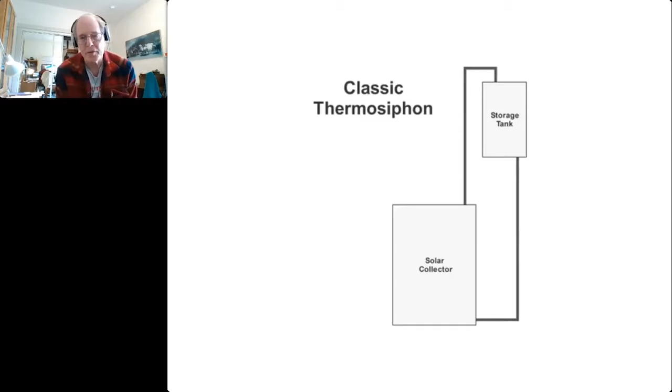Thermosyphon systems are remarkably simple. If you look at the diagram here, you can see it's just a basic loop with a solar collector and a storage tank. The basic design principle is you mount a tank above a flat plate solar collector. You plumb the top of the collector to the top of the tank, and the bottom of the collector to the bottom of the tank. It's simplicity itself.

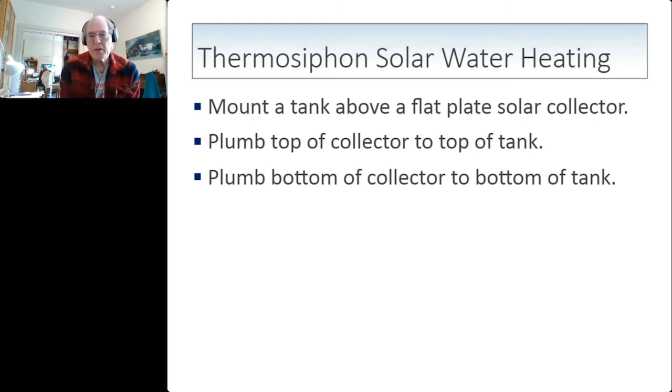Thermosyphon systems operate when the sun shines on the collector and warms it up, and the warm water rises into the elevated tank, while the coldest water at the bottom of the tank sinks down into the bottom of the collector, creating a circulation loop.

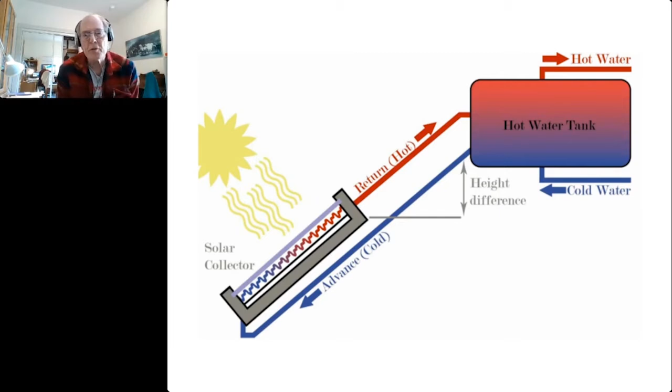The advantages of thermosyphon are many. They are completely automatic — they flow when the collector is warmer than the tank, and stop when it's not. There are no complicated parts to fail. There's no heat exchanger or toxic fluids. No electricity is required. It's inexpensive, and it's simple enough to do yourself.

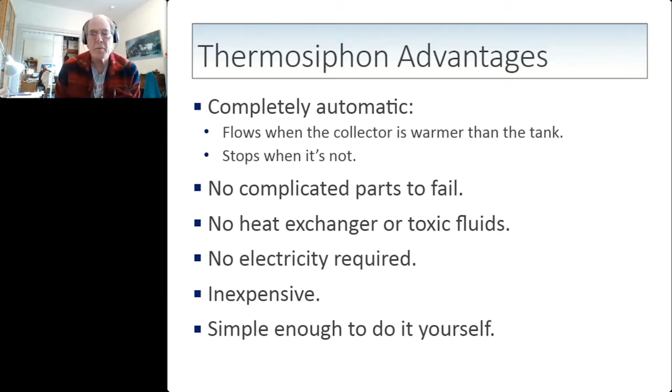Thermosyphon has a couple of disadvantages. One is that the tank must be above the collector in order for the warm water to rise into it. If you have a source of water in an open system — operating at house pressure as part of the pressurized system — you could have a problem with hard water creating scale inside the collector, since you're circulating ordinary water through it. And because it's a thermosyphon system, it has relatively slow circulation compared to a pump system, so there's more heat loss, making it a little less efficient.

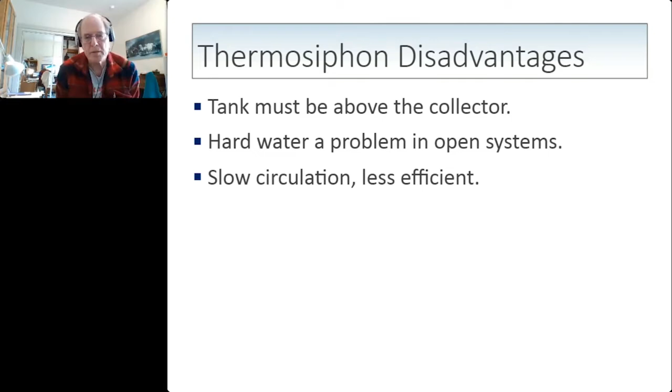But of course, the big disadvantage with the thermosyphon system is its Achilles heel, which is freezing. It's an unfortunate property of water that it expands when it freezes, and the pressure can burst the pipes in the solar water heating collector. A single cold night is enough to ruin your collector.

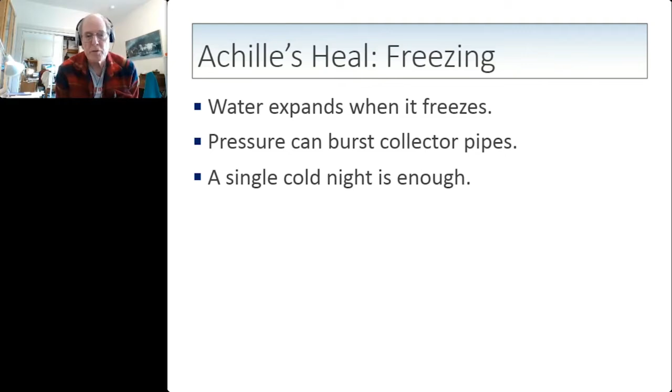So people have put in place various freeze protection solutions to prevent solar water heating systems from experiencing those broken pipes: a drain-down system, a drain-back system, antifreeze with a heat exchanger. But any of these create complications, so it's no longer simple and no longer cheap.

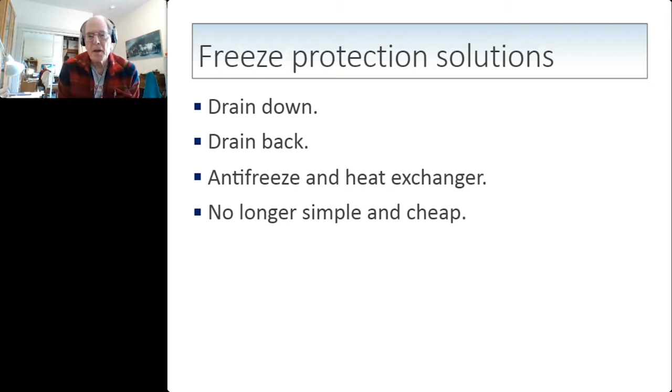So I went back to basics. When I was teaching at Cabrillo College and explaining thermosyphon systems, I would clarify for my students that the basic idea that warm water rises is actually not quite correct, because when you add heat to water, it doesn't acquire anti-gravity properties that cause it to go up. In actual fact, the warm water expands and becomes less dense, while the cold water, which hasn't expanded, is more dense.

And in a loop, when the cold water sinks, that lifts the warm water, creating the circulation loop that makes the thermosyphon work. But the basic principle is that cold water sinks because it is more dense.

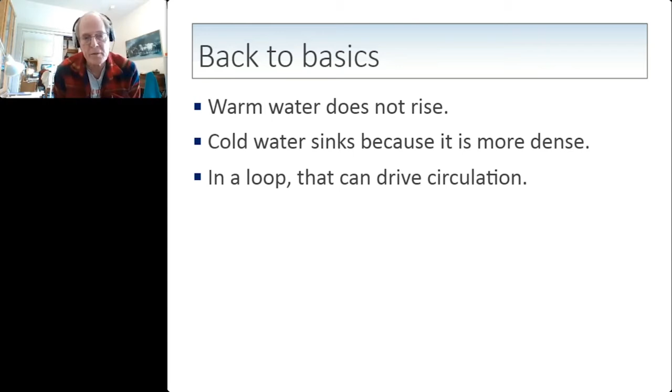So my new solution works on the principle of allowing the cold water in the collector to sink. You do that by adding a second loop to the thermosiphon system. You have the normal loop where the solar collector feeds water up to the storage tank, but you also have a second loop with a heat source below the collector.

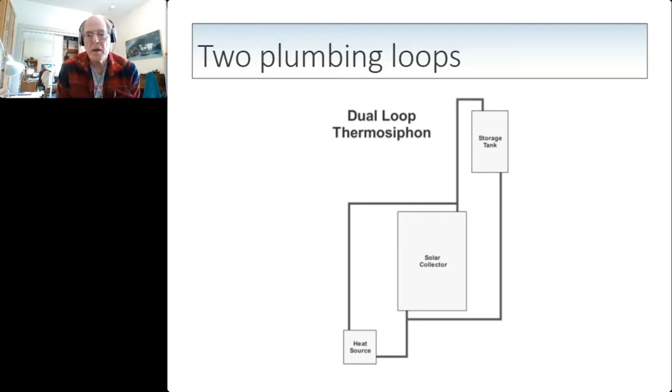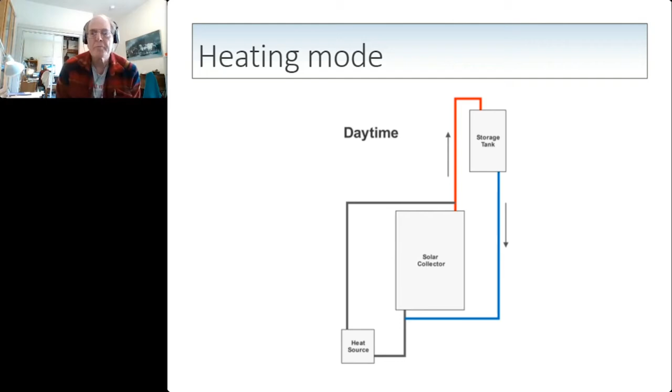In heating mode, the coldest water in the storage tank sinks into the solar collector, driving the warmer water up into the storage tank. That's the normal thermosiphon heating mode. But when it's cold and the water in the collector is cold enough to sink, it sinks down into a heat source, which warms the water and carries it back up into the collector. By sinking into a heat source, it prevents the water in the collector from freezing, and the circulation brings warm water back up, keeping the collector temperature high enough that the water doesn't freeze.

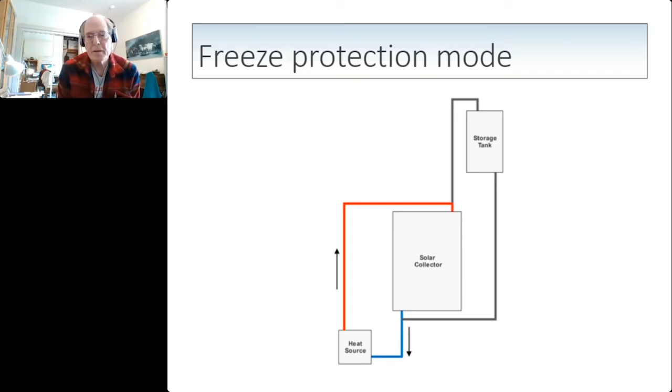If you want to put a heat source below a collector, an engineer might think the first thing to do is create an active heater with a thermostat that turns on when the water gets cold. But you don't actually need that, because the heating requirements here are pretty minimal. What you need to do is keep the temperature above 4 degrees Celsius, the highest density point of water, and that's relatively easy to do. You can do it with ambient heating from a building, or with ground heat from a buried coil.

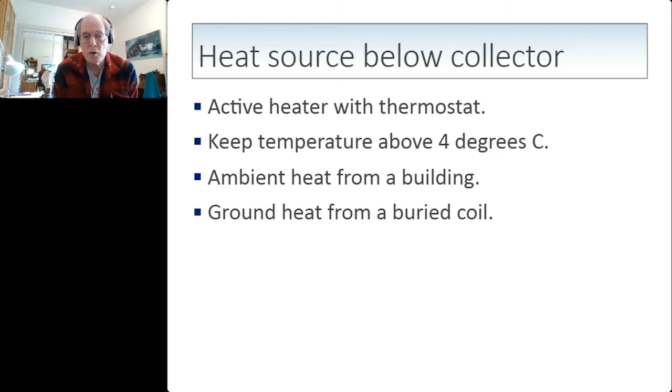I want to be clear that this is not just a theory—this is my example of a solar water heating system that incorporates this. I acquired these solar panels secondhand, actually for free, because someone was removing them from their roof. They're copper plate collectors with copper pipes, very nice. A little bit aged, but they work just fine.

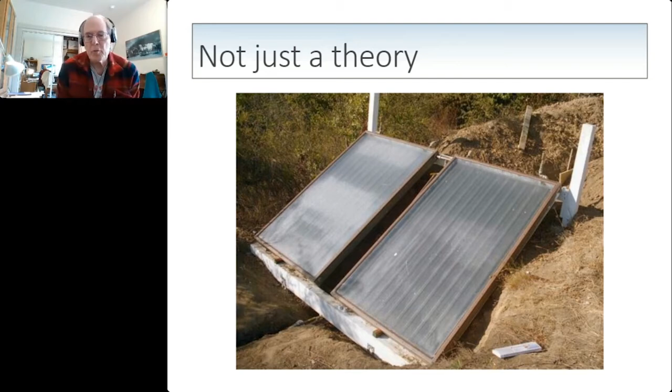I set them up with a normal thermosiphon system. In my case, they were on a hillside below the house, so I buried the pipes in the ground with a great deal of insulation and protection. They rise about 17 vertical feet into a tank in the house—that's the basic heating loop for the thermosiphon.

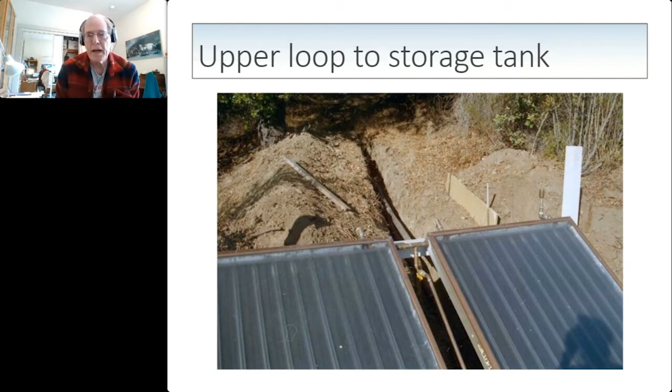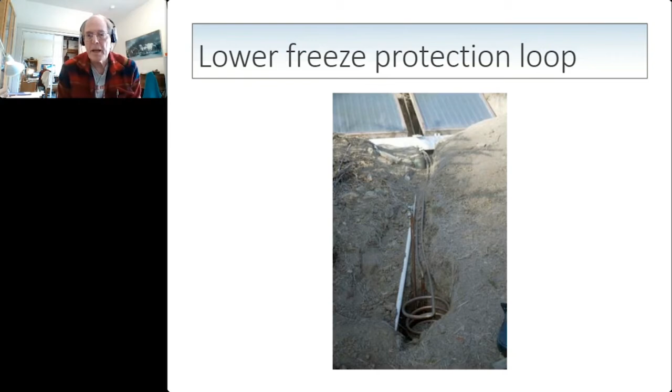Of course, I wanted to prevent this from freezing, so I added the lower freeze protection loop, which is a second loop of copper pipe plumbed into the same connections but going down instead of up. At the end of those circulation pipes, I buried a coil of copper pipe. I was fortunate to find 1-inch coiled copper to do this, so I could run a long length of pipe without many joints and easily form it into a coil. I buried this about 3 feet deep in the ground.

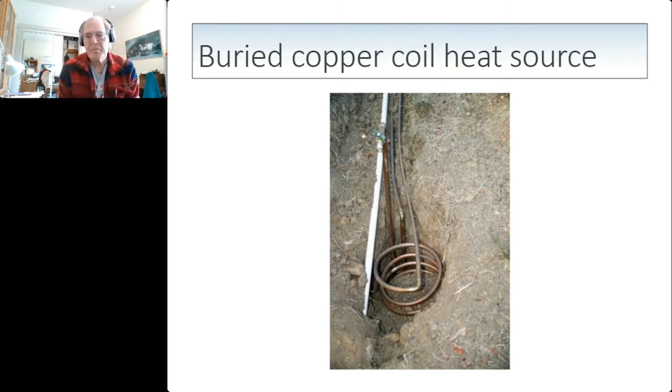And it works. I put this in service in September of 1999. I'm located in Northern California, and we experience a few freezing nights per year, getting as low as the low 20s. There'd be frost on the ground, but not on my collectors, and I had no burst pipes. This system operates with literally zero maintenance—it just continues to operate and has operated for 20 years, providing me with hot water without freezing.

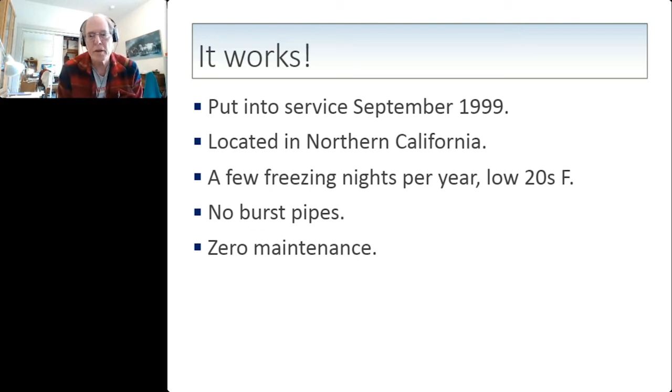If you want to incorporate this design principle, there are several things to consider. First is the climate. I don't think I would try this in North Dakota, because the heating requirements to keep the collector from freezing in a North Dakota winter would probably exceed the heat you'd gain from the solar water heater, and wouldn't be worth it—unless you wanted to drain the system during winter and operate it only in 3 seasons, which would be fine.

The height difference matters. The greater the height difference, the higher the heat flow, but then of course you have longer pipe runs. The pipe diameter is significant. I tried to go with a 1-inch pipe to reduce friction in the pipe.

You want to minimize the number of pipe joints and bends because thermosyphon flow is rather gentle, and you don't want to create too many blocks to inhibit the flow. You want to insulate the pipes thoroughly. You don't want to lose heat, and you don't want to expose pipes to freezing temperatures.

You have to consider the rate of heat flow from your heat source that's below the collector. Sometimes that's hard to judge, and in my case, I just made the biggest coil I could and put it in the ground.

You also have to consider the reliability of the heat source. If it's an active system, you have to worry about power outages and it not working. But in my case, burying a coil in the ground is a very reliable source of heat.

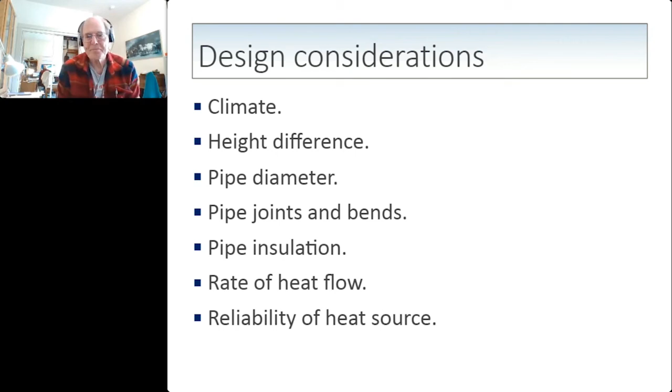The home example I give you is from 1913, showing a picture from the book by Ken Butti and John Perlin, of a solar water heating system installed in Southern California with a flat plate collector circulating water up into the tank stored in the attic.

The reason I mentioned 1913 is because that was the year they had a hard freeze in Southern California, and many of these systems that were in place at the time froze, and the pipes burst, and the company was running around trying to fix everyone and keep their customers happy.

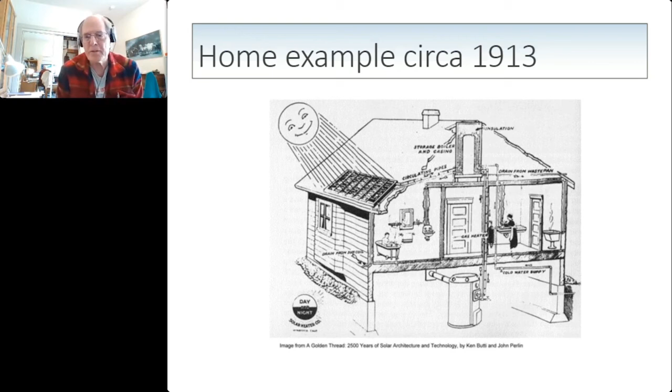If, at the time, they had installed a second loop to carry the coldest water from the collector down into a heat exchanger in the basement, for example, with a return line to bring the warm water back up to the collector, then they could have prevented those freezes.

And of course, this technology was available at the time because it's the same principle that the heating system operates on. So it would have possibly changed the course of solar water heating in Southern California if they had had this design principle.

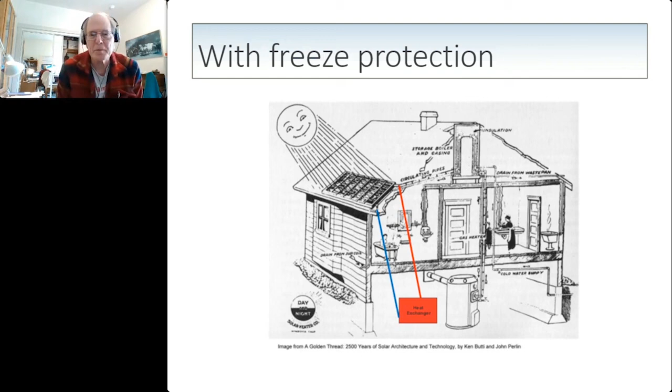The potential for this is in several different areas. Of course, do it yourself, as I have demonstrated, because it's so simple—it's just plumbing. And that also means it's inexpensive, so it could be done in developing countries. Remote locations are particularly advantageous because it doesn't require electricity.

And of course, this could be incorporated into commercial products. There's a lot of thermosyphon water heating systems all over Europe. When I toured in Greece and Italy, I saw many of these on rooftops. Most of these are set up with a heat exchanger and a heat transfer fluid to prevent freezing.

But they could make them less expensive as an open system if they run a second set of pipes down into the living structure, which is, of course, generally below the collector if it's mounted on the roof. So these are just some of the ideas. I'm putting this idea out there because I think it has a lot of potential for application around the world.

If you think in terms of where thermosyphon systems can operate today, normally you wouldn't want to put it any place where you'd have any freezing at all. So that limits the range to pretty much the tropics. But this idea expands the range of thermosyphon water heating systems into northern and southern latitudes that would normally not be suitable for it.

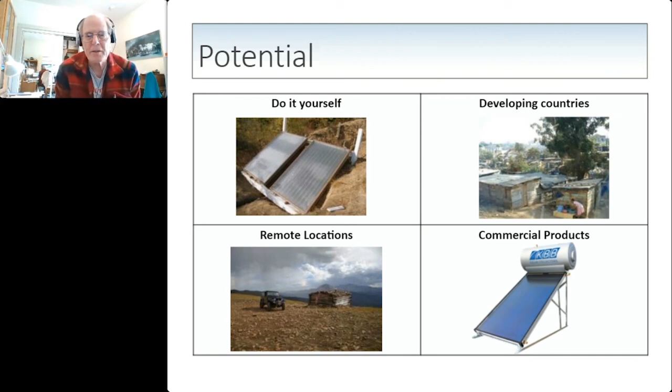So I think it has a lot of potential, and I'd like to see it get out there. That's why I made this idea available in this forum. So thank you very much.